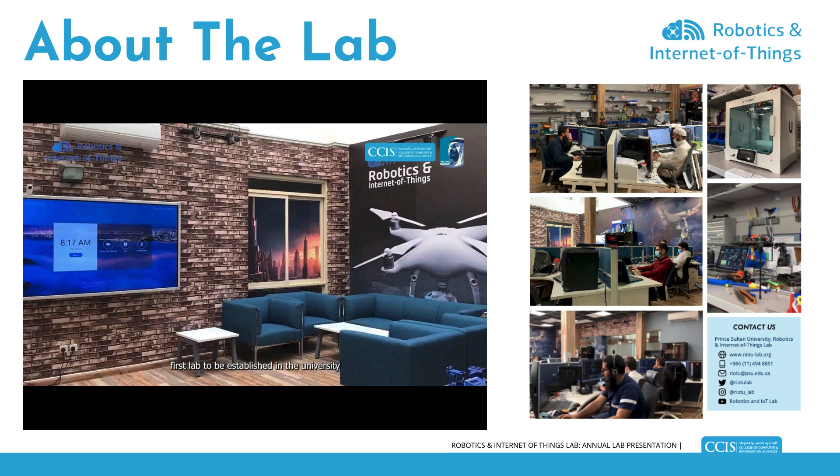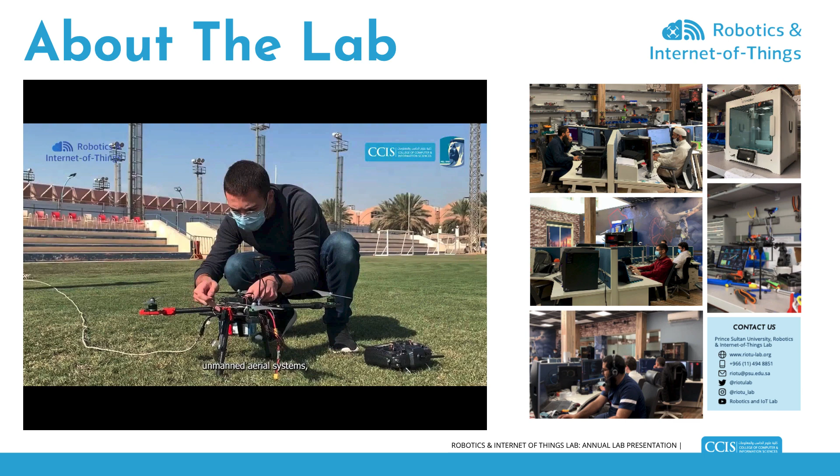So let me first give you a brief overview about the Robotics and Internet of Things Research Lab. The RIOT-U Lab is the first research lab established at Prince Sultan University and currently has 15 full-time researchers with different backgrounds in computer science, software engineering, electrical engineering, and mechanical engineering, working on multidisciplinary areas including artificial intelligence, drones, mobile robots, Internet of Things applications, and emerging technologies.

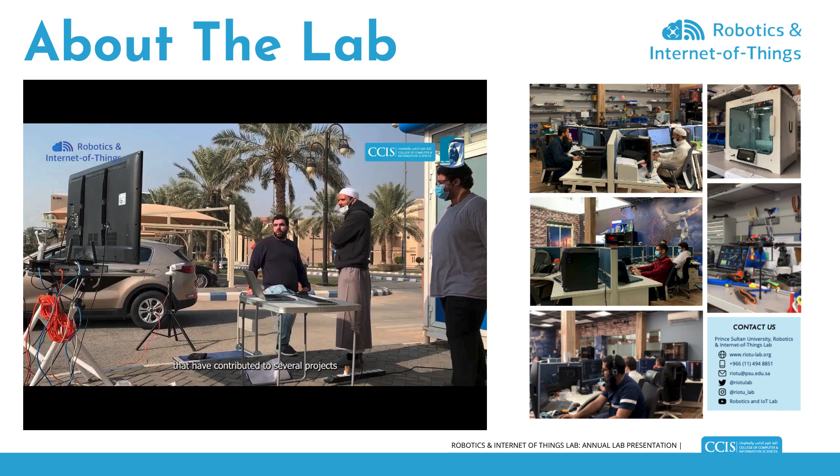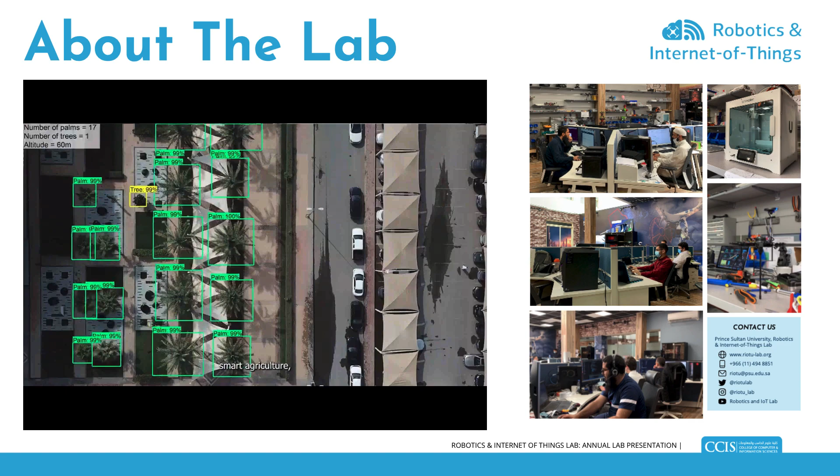The lab focuses both on academic research and also innovation. The research lab has contributed to several innovation projects, including the development of a drone delivery system, face recognition platform, vehicle identification and license plate recognition, telecommunication tower inspection, and others, which we will discuss in this presentation.

In this first part of the presentation, I will make an overview of the different applications that we have developed in the Robotics and Internet of Things Lab. Let me get started with the aerial survey applications.

As you can see from these slides, the global aerial imaging market size has been increasing since 2017, and it's forecasted that it will reach $4,125 million by the end of 2025. This makes a compound annual growth rate of 14% every year. On the right side, you can see the distribution of the global aerial imaging market by drone platforms, as of 2017. You can see that fixed-wing aircraft take the largest share here, using vertical cameras.

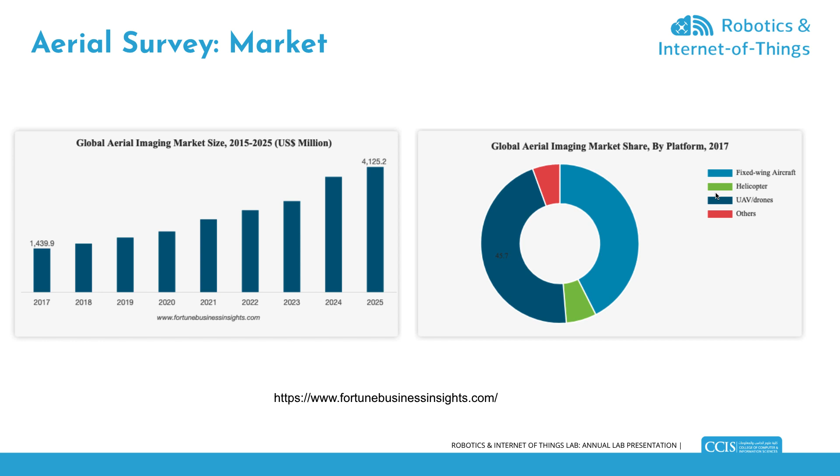The second largest platform for aerial imaging are UAVs and drones, which are multi-rotor systems, with 45.7%. We also have helicopters with a small share here in green, and other types of platforms in red.

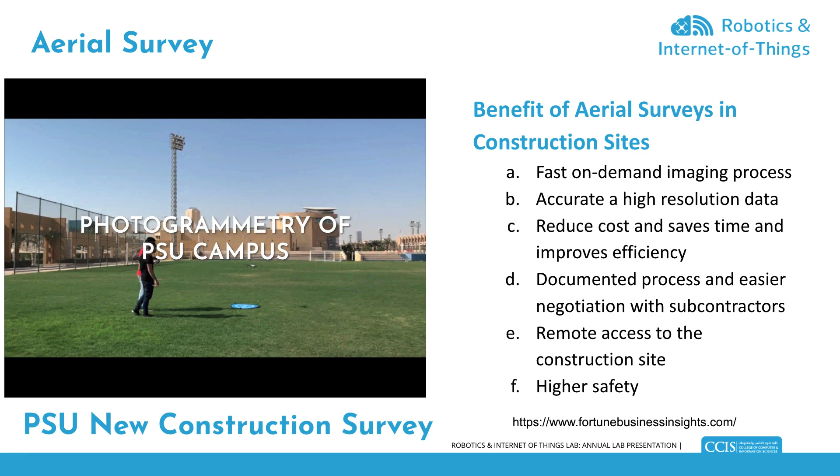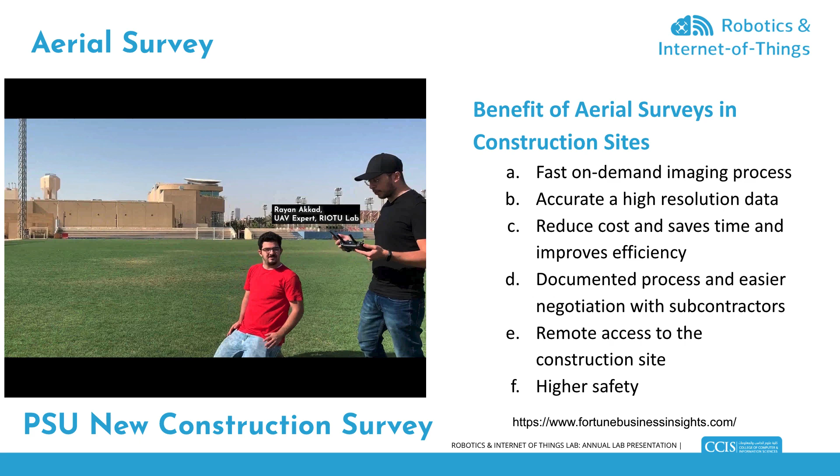So here in this slide, I'm going to take you through the different benefits of aerial surveys in construction sites. First of all, it provides a fast, on-demand imaging process, so you can take a drone and collect images at any time for any area of interest. It provides accurate, high-resolution data because you can fly a drone at lower altitudes as compared, for example, to satellite images. It helps reduce costs, save time, and improve efficiency.

For example, in this mission we developed a 3D and 2D model of the whole PSU campus, which just took 1 hour of flight for collecting data. And finally, you get accurate, high-resolution data, as you can see.

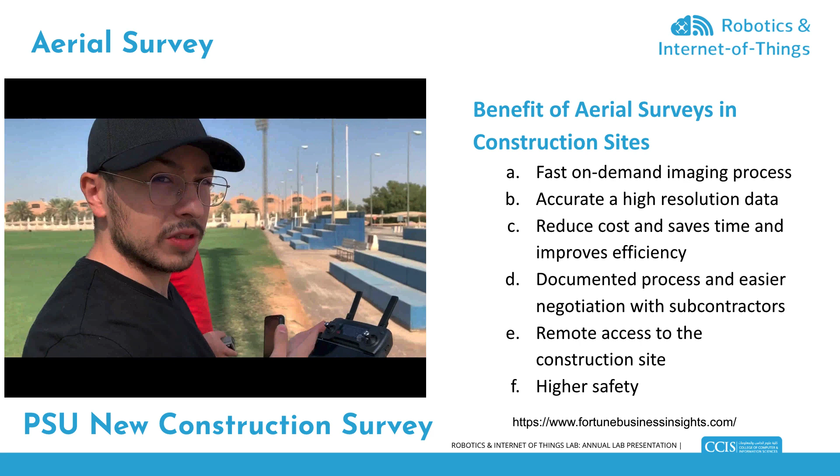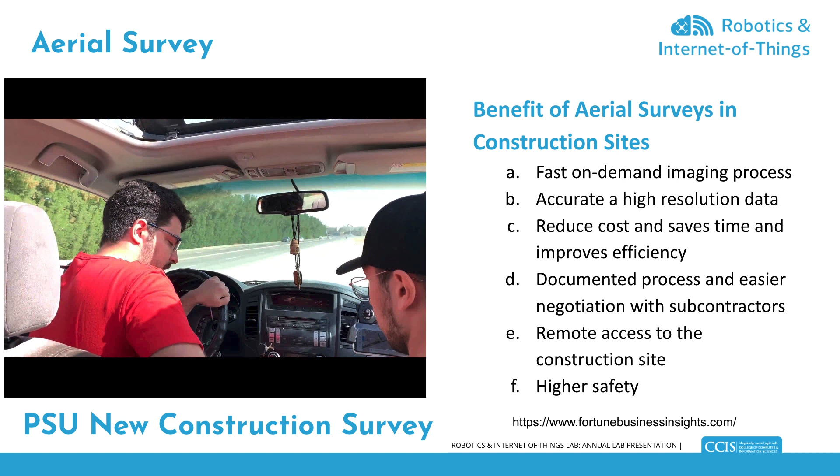Another benefit is that the whole process is documented, which provides easier negotiation with subcontractors, especially if companies would like to subcontract others to execute the aerial survey missions. It also provides remote access to the construction site, so you can visualize at any time the evolution of construction remotely. Stakeholders do not need to go on-site to check what is going on and what is the progress of the new construction building.

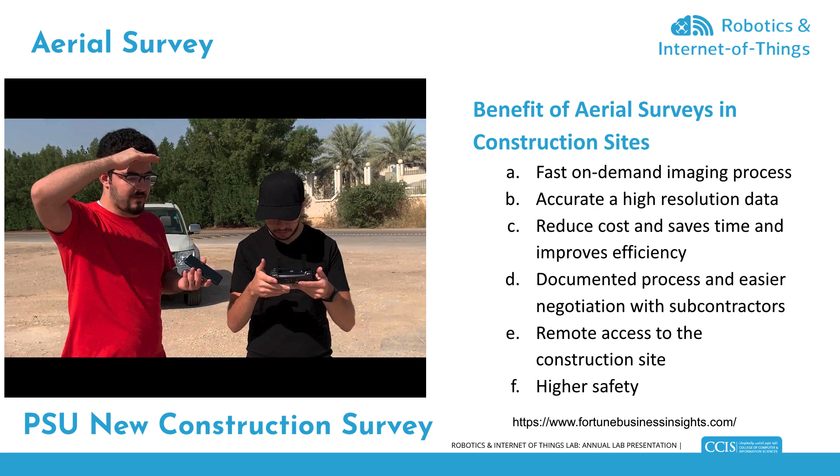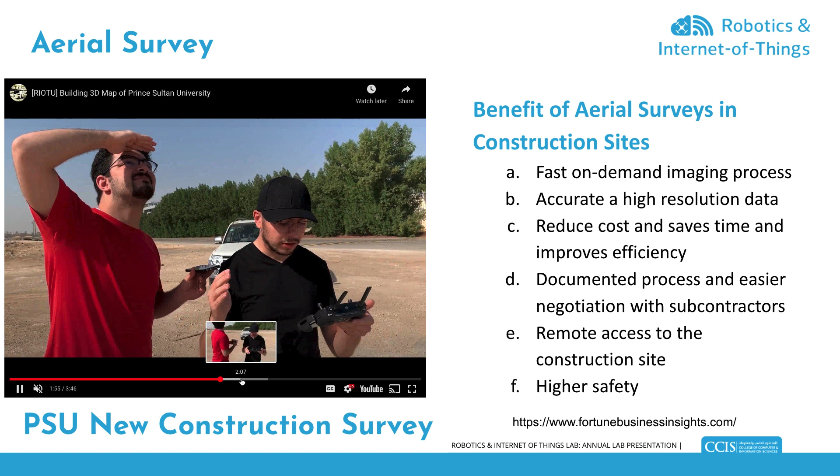In this mission, you can see our drone pilot Ryan and also Bilal Khawaf, one of the best graduate students who is very active in drones, conducting this mission to provide the survey of the whole PSU campus. At the end, we collected several images, I don't remember exactly, but it should be a couple hundred images, depending on the resolution required and the accuracy we would like to achieve. So the number of images collected depends from one mission to another.

And finally, these images will be processed by specialized software like Agisoft, Drone Deploy, or Pix4D in order to generate high-resolution maps, either in 2-dimensional or 3-dimensional models, as you can see here.

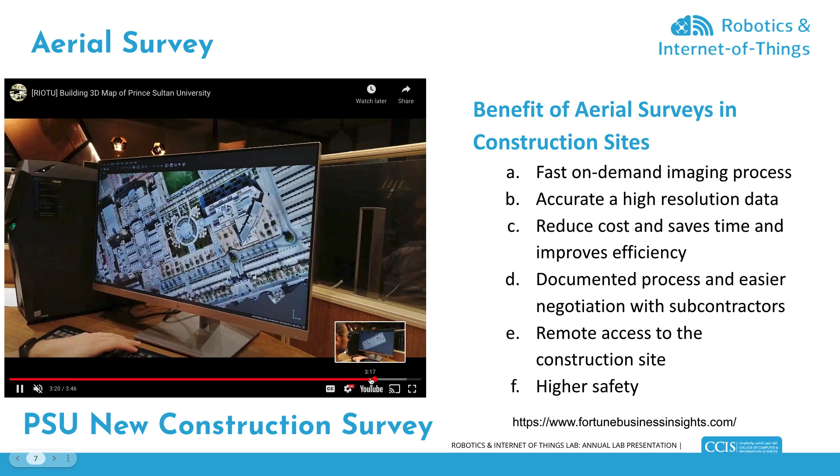So here in this slide, I show you one of the results we obtained from the survey mission, the new construction building. It provides very high resolution. This is a 2D model generated from an aerial survey mission, and in general the accuracy can reach 2-3 centimeters horizontally and 5 to 6 centimeters vertically, so it's very high accuracy.

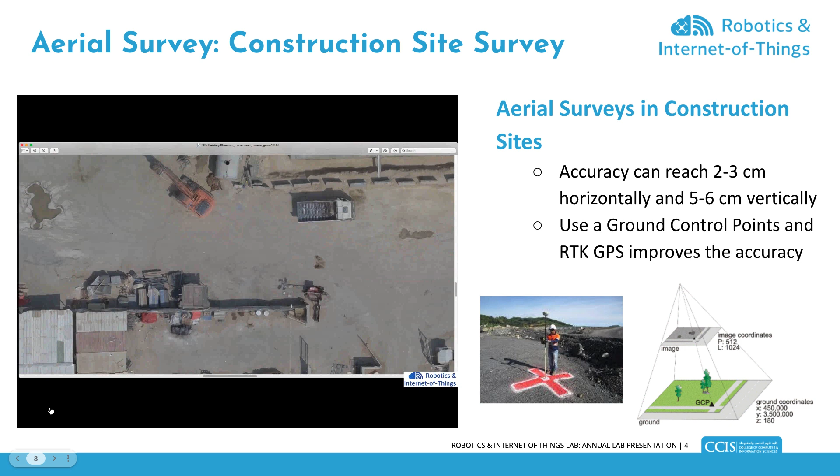And we can even increase the accuracy. As you can see, we can see all the details, even small things on the ground. You can easily see them from this model.

Now, this is a three-dimensional model. Using this model, we can even do measurements of the surface or volume of a particular area, and this can help, for example, in checking whether the construction is compliant with the planning done in advance.

And the accuracy can be improved further by using ground control points, which are landmarks that we put on the ground with known GPS locations. We use RTK GPS to get the exact location with centimeter-level accuracy of these landmarks, which are later identified by the drone, and the software used to process the images makes an alignment of these landmarks to improve the accuracy of the 3D model.

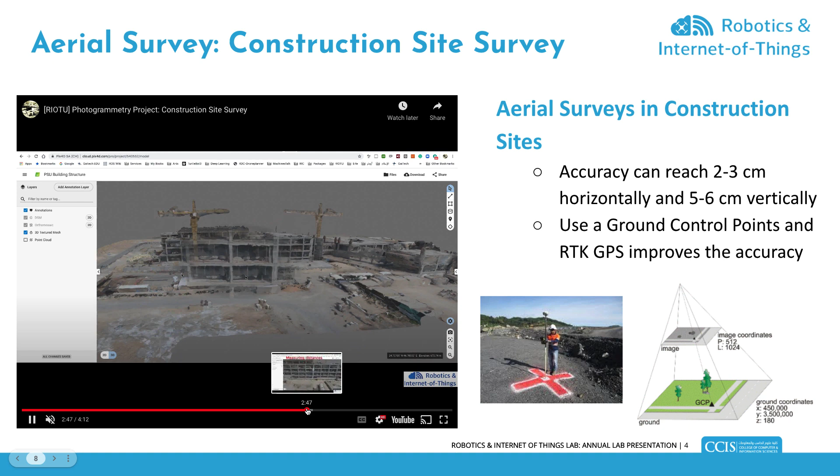So as you can see here, you can have measurements for particular areas or segments. You can measure the area of a particular region, or another particular region, and you can also measure the volumes. So plenty of things we can do with aerial surveys in construction sites.

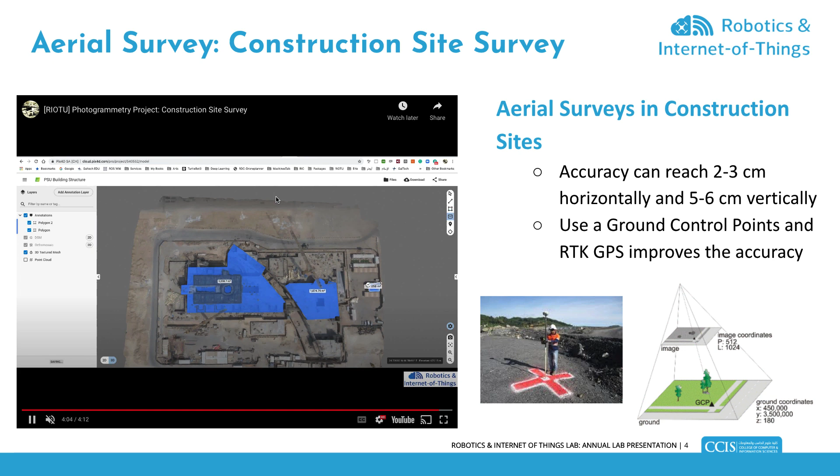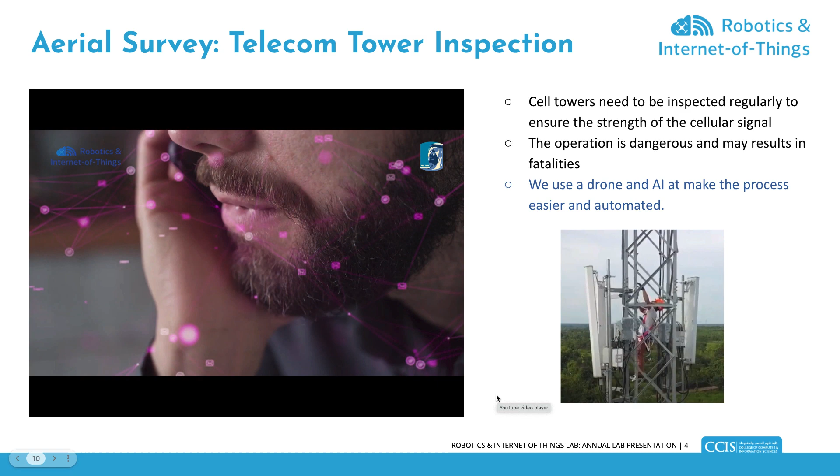Another achievement we have done in the lab is to use aerial survey for telecommunication tower inspection. This work was done in collaboration with our partner in the US, the GM6 company. Cell towers need to be inspected regularly to ensure the strength of the cellular signals, and this operation is usually dangerous.

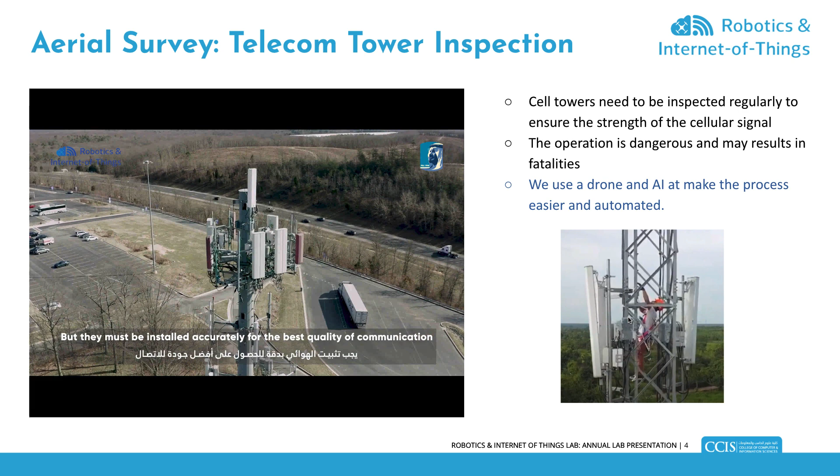You can see here employees have to climb the whole telecommunication tower to check the current state of the antenna, whether there is inclination, any anomaly, or any defect. However, if we use a drone, the process can be much easier and much more flexible.

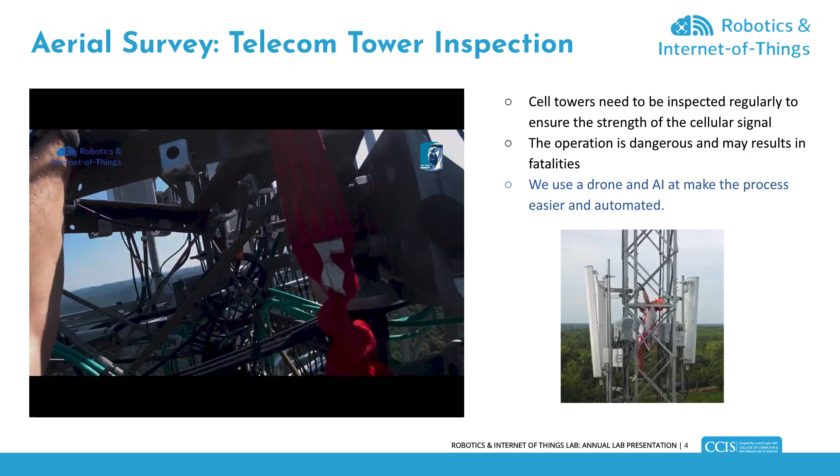In the lab, we have used drone combined with AI to make the process easier and automated. Instead of this tedious and dangerous manual process, we developed a set of tools to make cell tower inspection much easier. We just use a drone to get images from the cell tower, and finally we use software to provide a high resolution model of the antenna. This is much more complicated than aerial survey for constructions, because with constructions you have big surfaces, but here the reconstruction of the telecommunication tower is much more tedious.

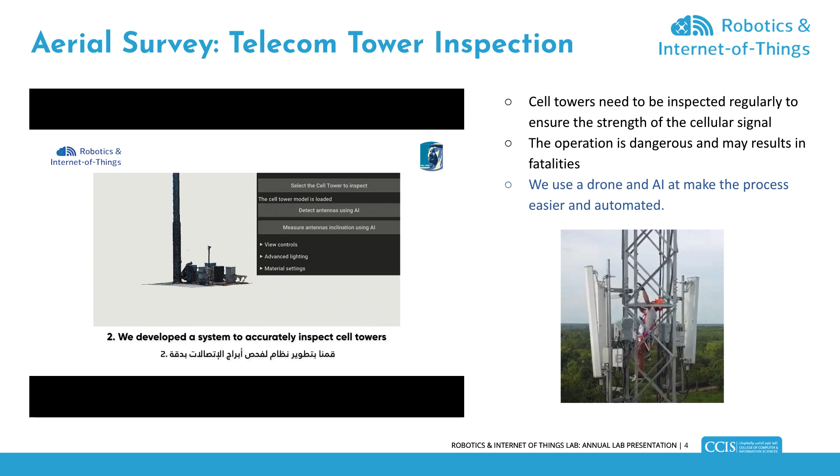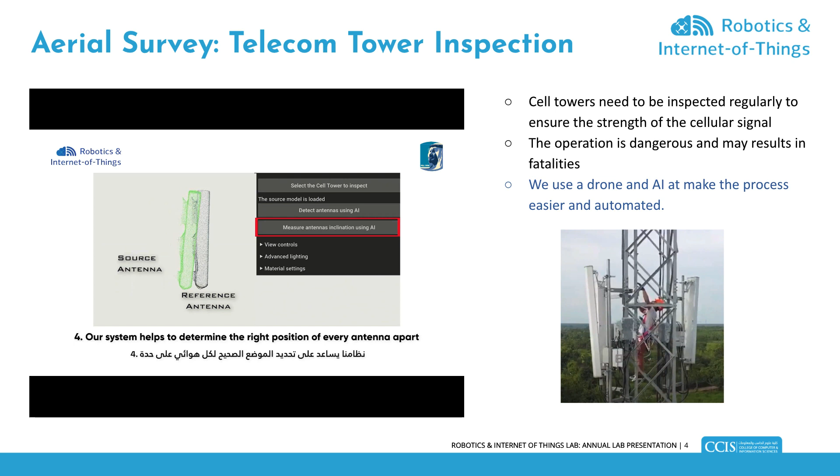Our AI solution is based on two steps. First, we have an instance segmentation model using deep learning to automatically identify the antennas, as you can see. Second, we use a reference antenna to measure if there is any transformation between the reference antenna and the detected antenna.

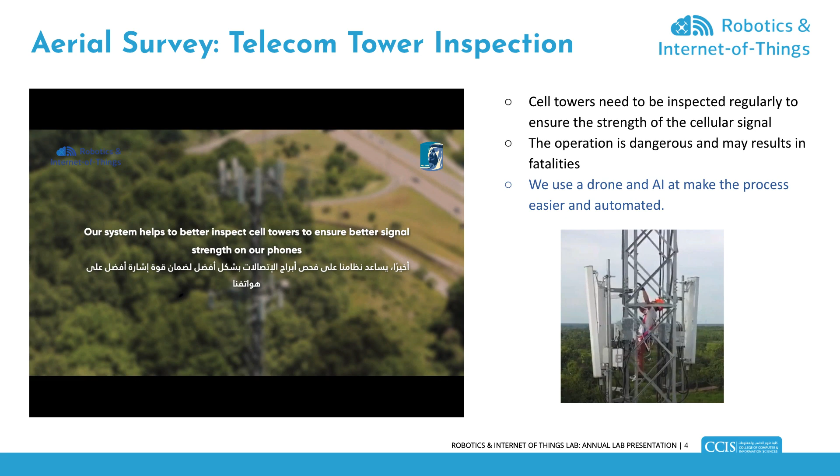By transformation, it can be an inclination with certain rotation or translation, and we consider this an anomaly that has to be fixed by telecommunication companies. So as you can see, this makes the process much easier and much more automated.

Another work we have developed is using unmanned systems for transportation system analysis, in particular traffic analysis. We used AI to accurately analyze traffic from UAVs, combining AI and aerial images, and we extract 24 types of information about the traffic.

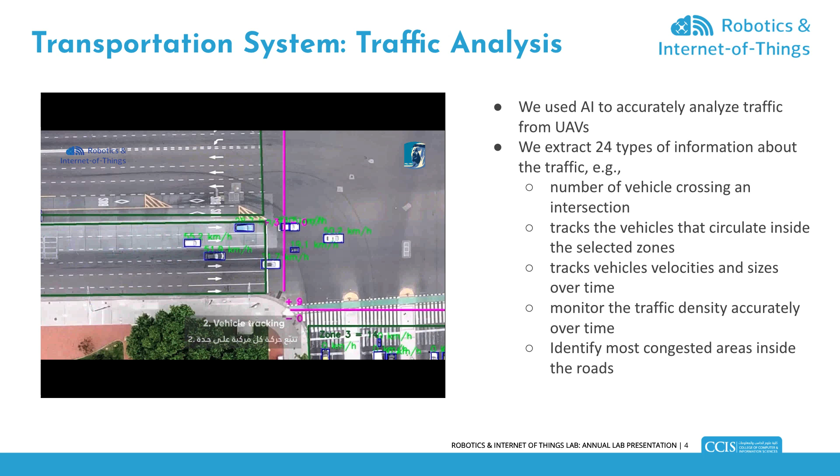We can estimate the speed of vehicles, determine the number of vehicles crossing an intersection, and track vehicles circulating inside selected zones, or track vehicle velocities and sizes over time. So we can extract plenty of information from aerial images using AI techniques.

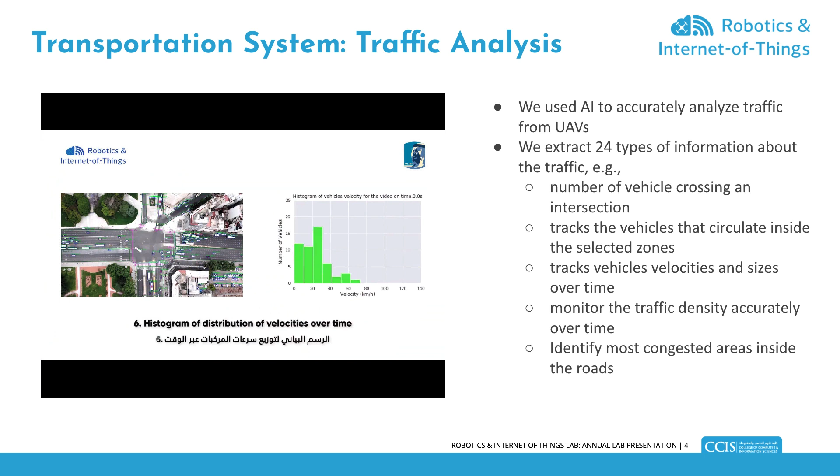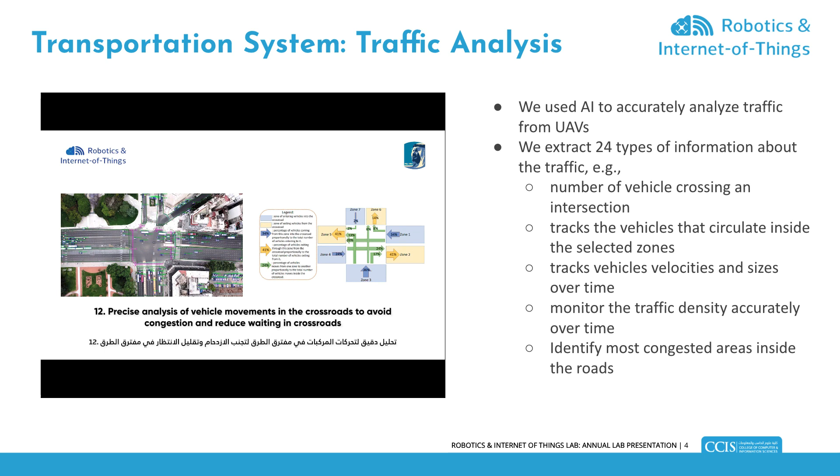Here we use object detection and tracking, and then save all the information into a log file, allowing thorough analysis of the different types of information we'd like to extract. As you can see, we can generate different types of charts, like heat maps for the average velocity per pixel, the most congested area inside the road, or monitor the traffic density accurately over time.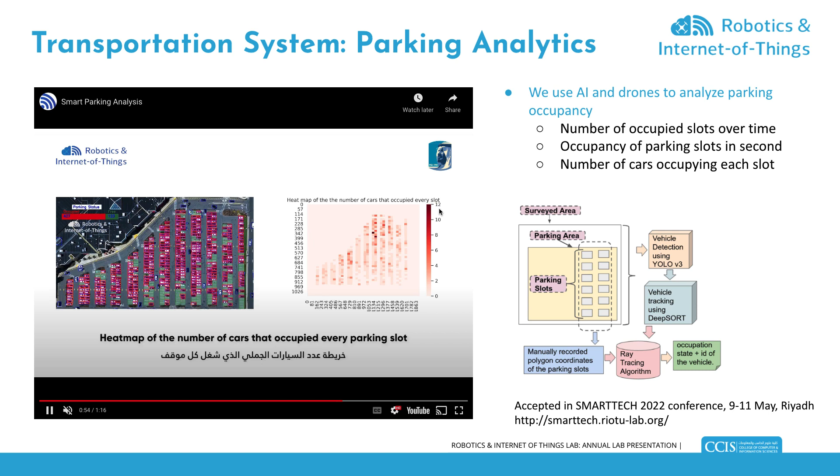We also log all the information extracted, and then we analyze it using some data science techniques to extract the number of cars occupied per slot, the occupancy of parking slots in seconds, and the number of occupied slots over time. In this demo, we have used YOLO version 3 and DeepSORT for vehicle tracking. For more information, you can refer to our paper that will appear in SMARTTECH 2022.

Another work that we have done is applied to the agriculture sector, and in particular we aim to count and also localize palm trees from aerial images. As you can see here, we can make an automatic detection of palm trees, and not only detection but also geolocation.

Geolocation here is a kind of complex process because, as you know, the accuracy of GPS devices can go up to 5 meters, and localizing the palm at around 5 meters will not be efficient.

So here we have developed a technique to combine multiple images that we collect, and we can generate several estimated points, then make an average geolocation. We have reached an average geolocation accuracy of 1.6 meters, so the maximum or average error for the location of a particular palm will be just 1.6 meters, which can be acceptable because usually the distance between palms can reach up to 10 meters.

One of our latest achievements is that we have developed a drone for delivery, and we've made different demos for the Ministry of Health in 2021 and also for Saudi Post.

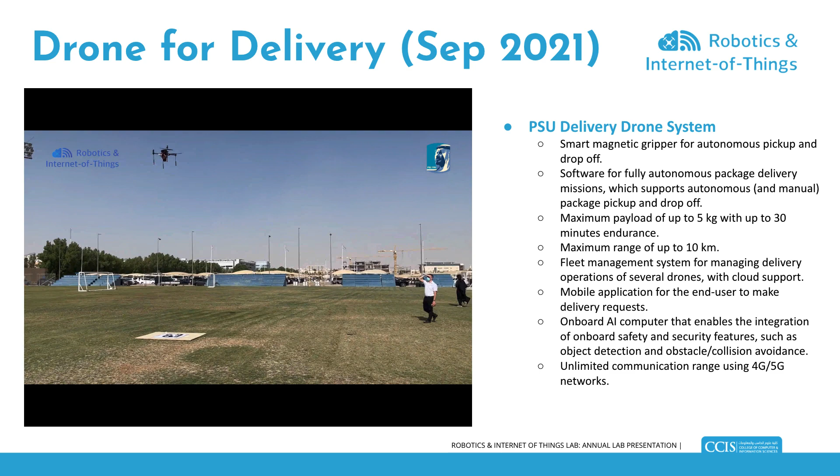The PSU delivery drone system provides a fully autonomous drone that is able to pick up a package from a particular location and then deliver it to another location in a fully autonomous manner, as you can see in this video demo. The features of our PSU delivery drone system: it has a smart magnetic gripper for autonomous pickup and drop off.

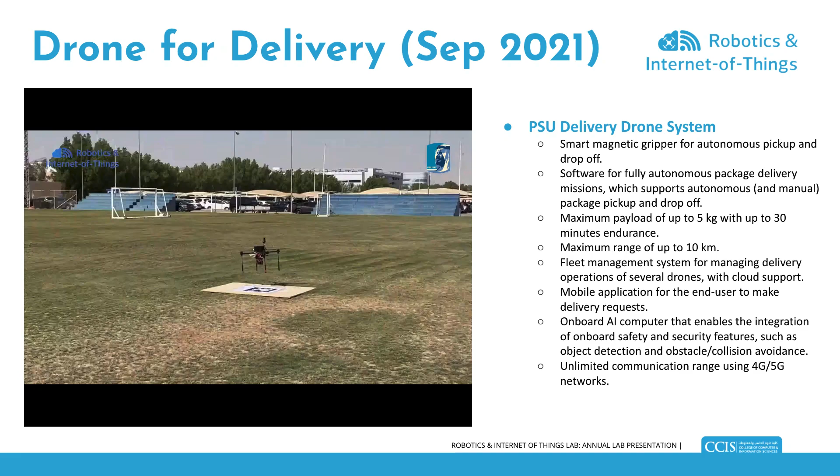We've developed software for fully autonomous package delivery and handling delivery missions, which supports autonomous package pickup and drop off. We have a maximum payload of up to 5 kilograms, but currently we are around 2 kilograms, and up to 30 minutes of endurance.

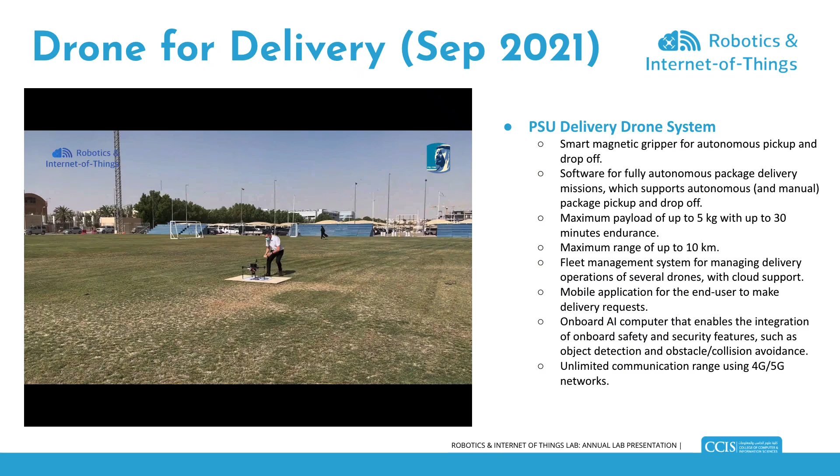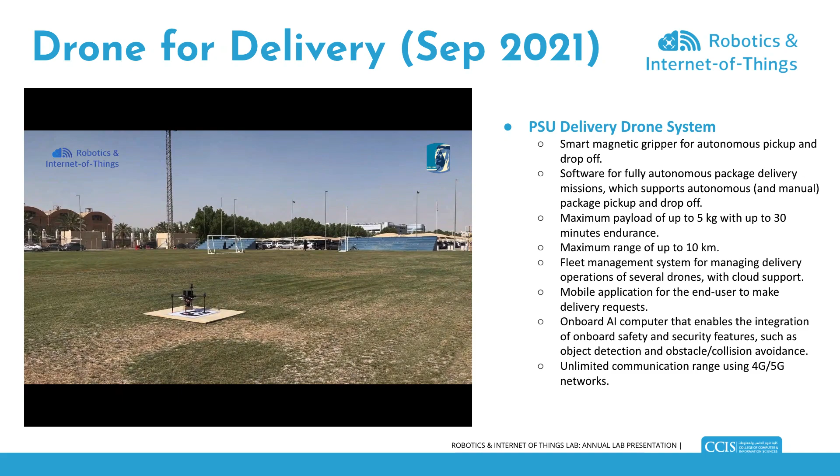The maximum range is up to 10 kilometers. We have developed a fleet management system for managing the delivery operation of several drones with cloud support as well. Now the user can use a mobile app to place a mission to the cloud, and then the mission will be validated, and finally, after validation, the drone will start execution of the mission.

We use an onboard AI computer to enable the integration of onboard safety and security features such as object detection and obstacle avoidance. The good thing in our system is that we use unlimited range. Unlike other systems that are based on telemetry, which is always limited in range, here we use 4G and 5G networks to communicate with the drone at any time.

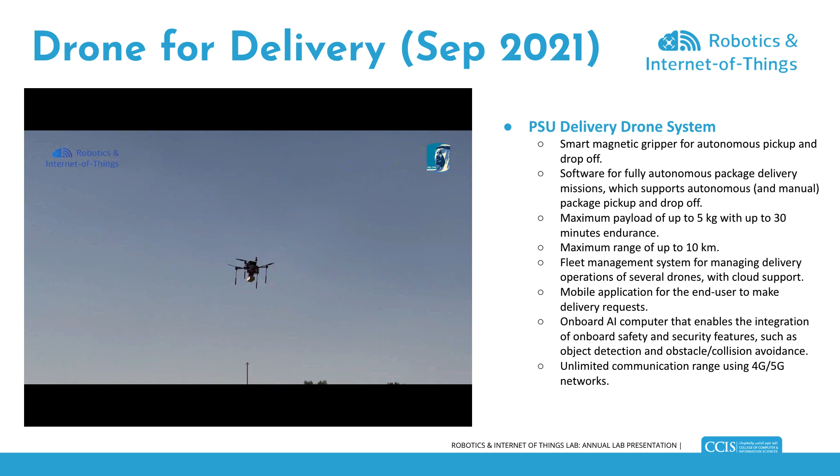You can see in this demo we have also developed precision landing. There was wind on the day of the demo, but the drone was able to land safely and accurately on the landing pad over here.

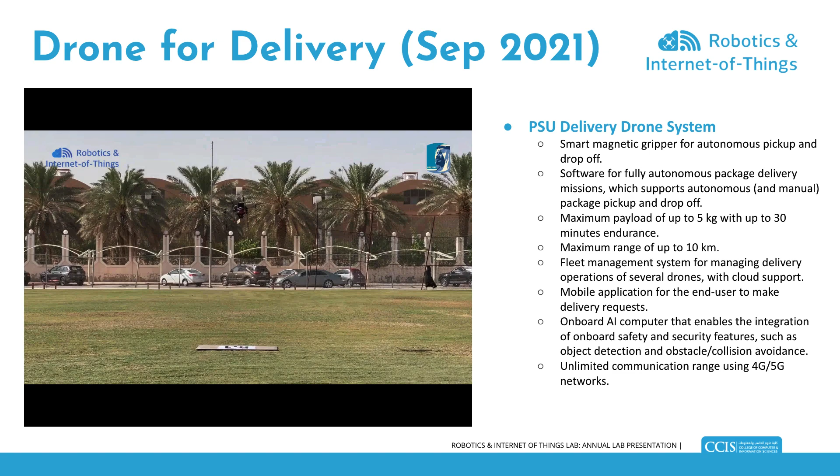This is another demo that we have developed for the Ministry of Health for the transportation of blood samples. And of course, with the blood sample, we also need to maintain temperature, which adds an additional challenge.

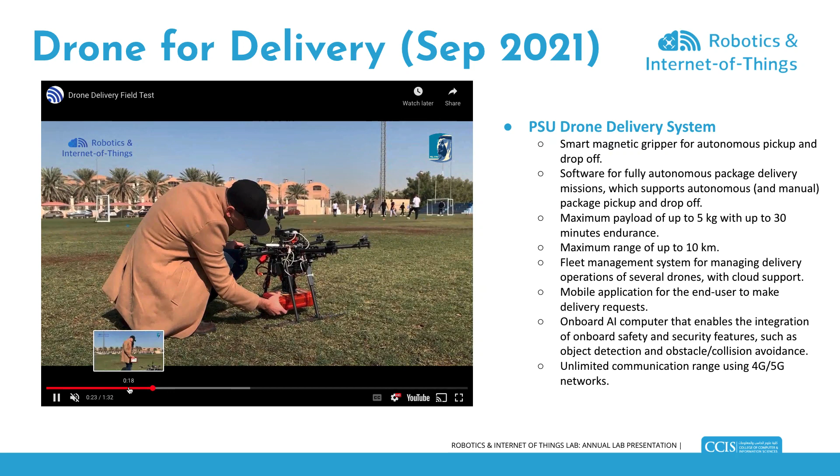In this part, I'm going to present the challenges facing UAVs and their deployment. Let me first start by providing the challenges when you want to design drone hardware. First of all, we have to identify what the drone requirements are, and the first thing we think about is the endurance, how long a drone can fly.

Usually we want the drone to fly as long as possible, but of course this is governed by the battery capacity, the payload of the system being carried, and the weight of the drone itself. There are a lot of parameters that come into play that will affect the possible achievement of the requirement.

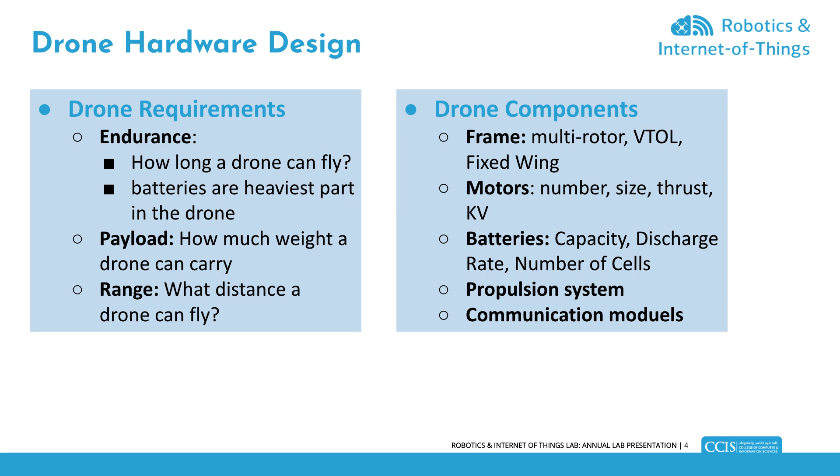Also the payload, how much weight we would like to carry. So there is a balance to make between endurance, payload, and also the range that the drone has to fly. What is the distance that the drone can fly? This depends on the endurance, and also on the speed of the drone.

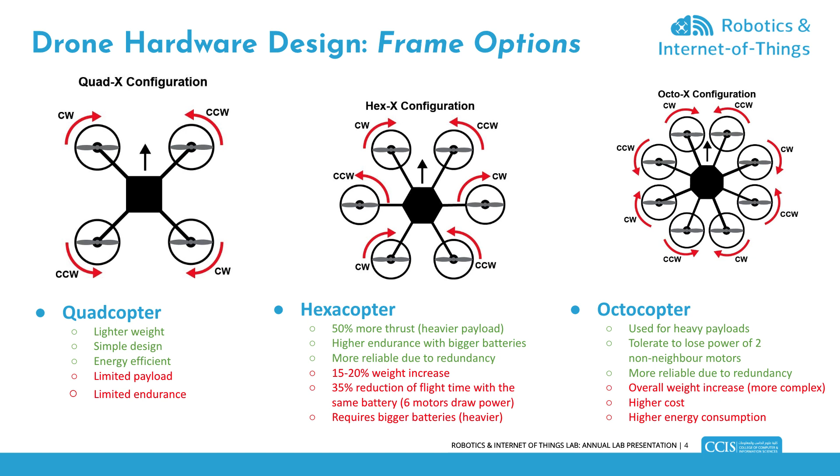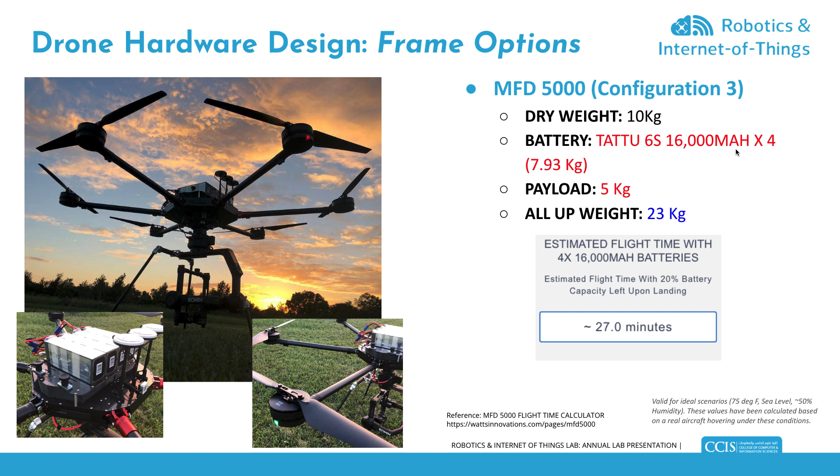This configuration is still able to jump from 17 minutes to 27 minutes because we use double the capacity of the batteries. This diagram, sourced from the MFD 5000 page, allows you to set different payloads and configurations, and it will estimate the flight time. When we increase capacity, the flight time increases for the same payload. For example, with a payload of 5 kilograms, we can jump from 17 to 27 minutes, and using different types of batteries gives extra flight time. This is the relation between payload, flight time, and battery capacity - for 10 kilograms, the maximum you can get is only 20 minutes.

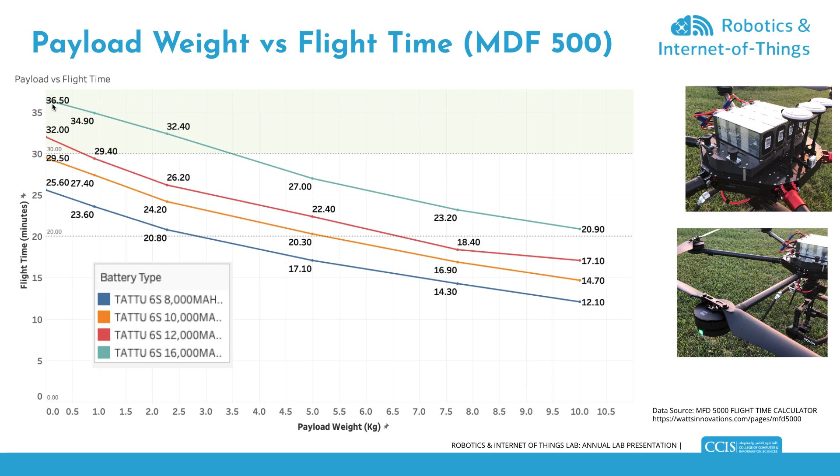If you don't use any payload, with zero payload, for example with the 16,000 capacity, the drone can fly at 36.5 minutes.

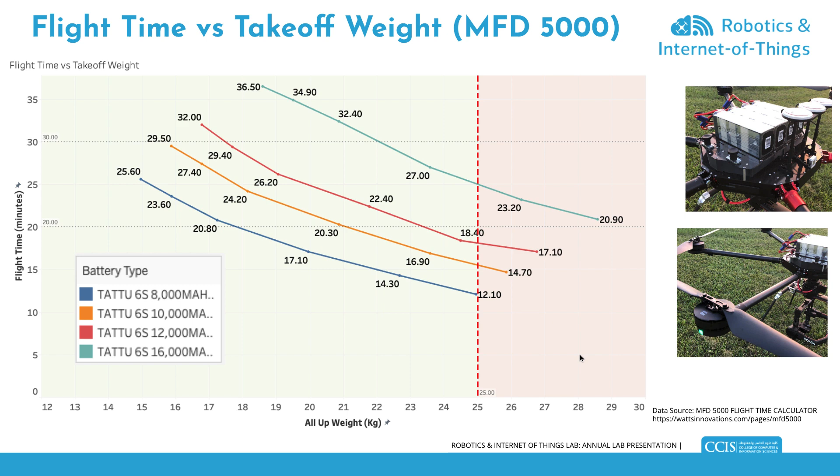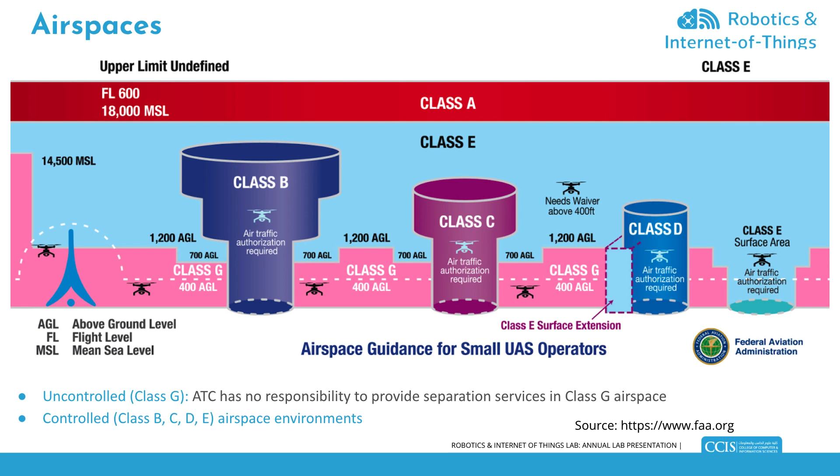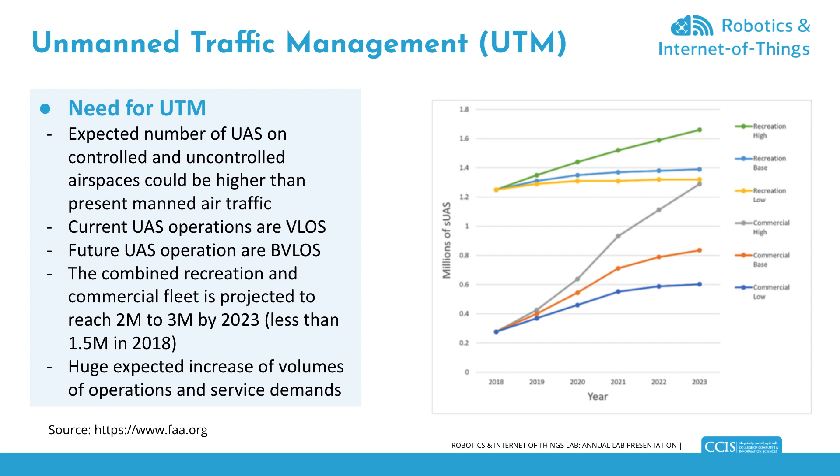An additional challenge is that a large portion of unmanned aerial systems will also operate in beyond visual line of sight mode, without visual line of sight, given that these drones will be fully autonomous. For example, for package delivery, the drone will be fully autonomous, as we have already seen in the previous demo. This is why a UTM is a must to allow for the deployment of UAVs.

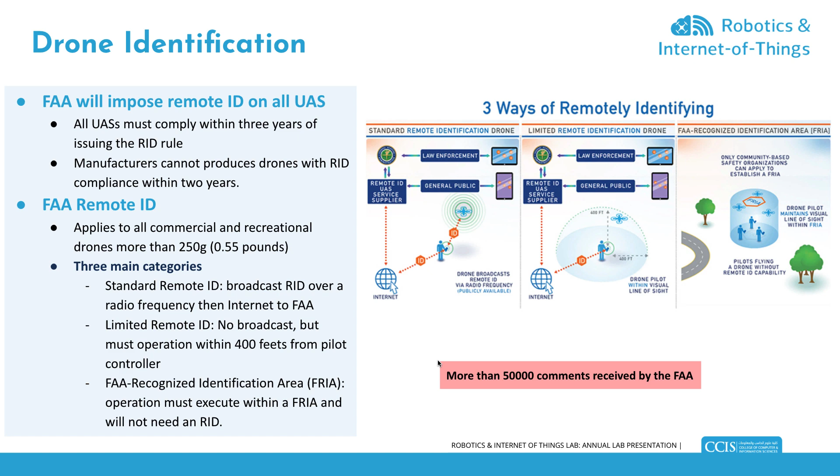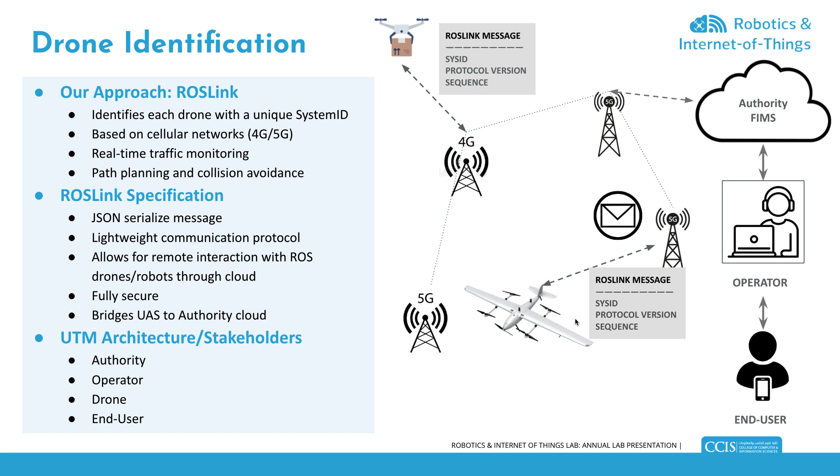Other challenges facing drone deployment include the type of communication, which can be point-to-point, network, or satellite. Cybersecurity is another very important issue facing beyond-visual-line-of-sight drone deployment, and has yet to be achieved in terms of ensuring authentication, confidentiality, availability, and integrity. One more challenge is designing drones with multi-package capabilities, since single package delivery would not be efficient or cost-effective.

There are even more challenges and opportunities to discuss, but considering the time limitation, I hope what was presented provided some insights about these challenges. Thank you for your attention.